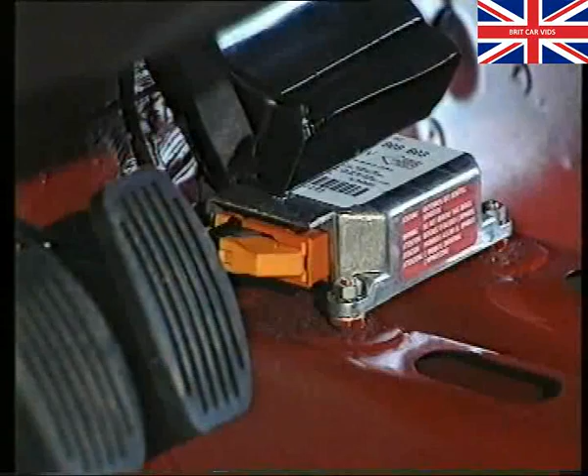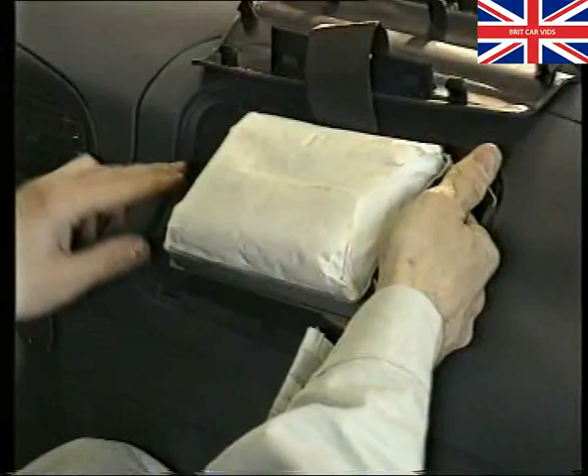The airbag system belongs among the so-called passive safety systems, i.e. elements increasing the safety for passengers and driver in the event of an accident. The electronically controlled system is made up of three elements: the control unit, the driver's module, and the passenger module.

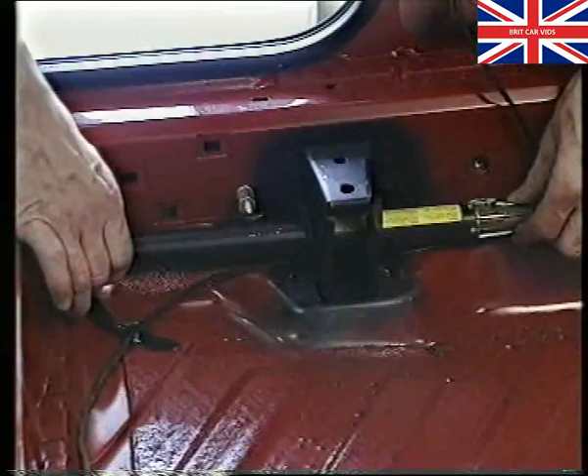For even greater safety in Skoda vehicles, the airbag system is installed in combination with special seatbelt tensioners, consisting of its own tensioning element, retracting system, and Bowden cable. The tensioner is mechanically controlled.

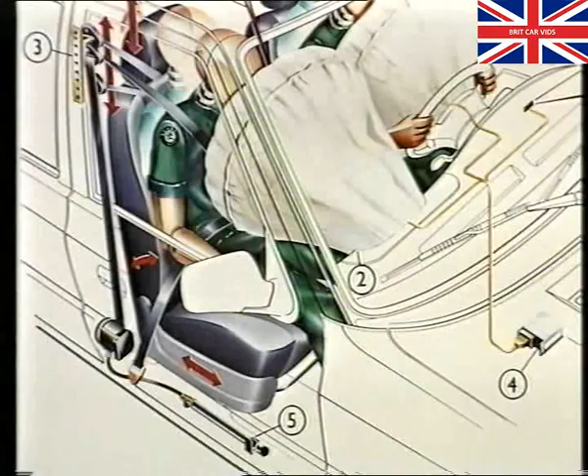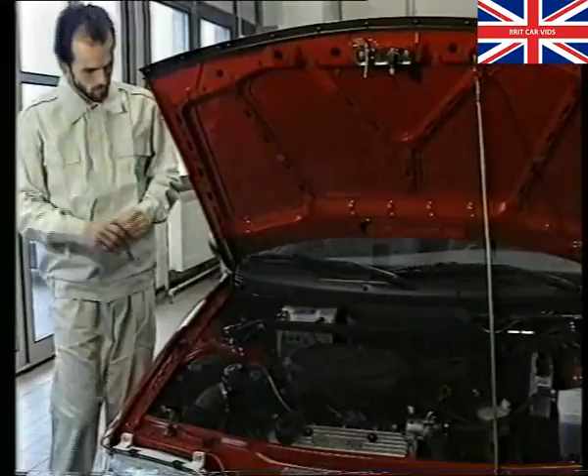Prior to disassembly or assembly of the driver's module, you must be aware that you are working with explosive materials, and so it is essential to proceed according to the workshop manual and to comply with the pertinent safety regulations. First, we disconnect the battery negative cable, and only then may we begin with the actual disassembly of the module.

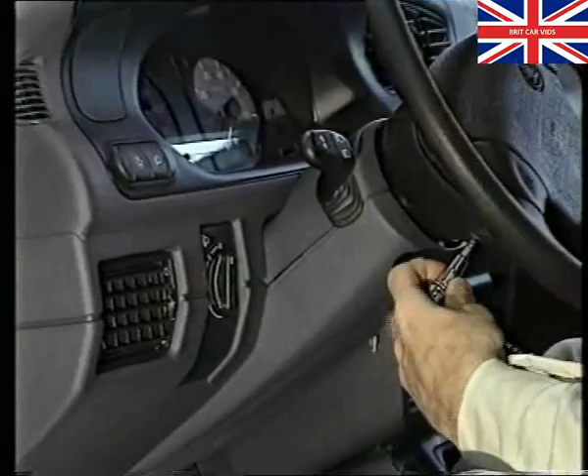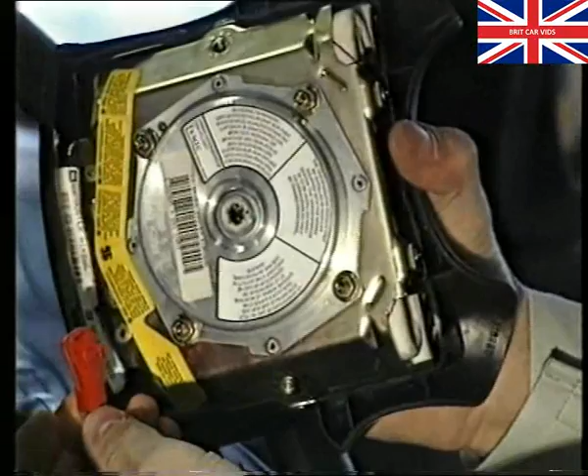On the reverse side of the steering wheel, loosen the two hexagonal screws. Then remove the module and disconnect the connector linking the module to the spiral link located within the steering wheel. Before removing the steering wheel, the front wheels must be aligned along the driving axis of the car.

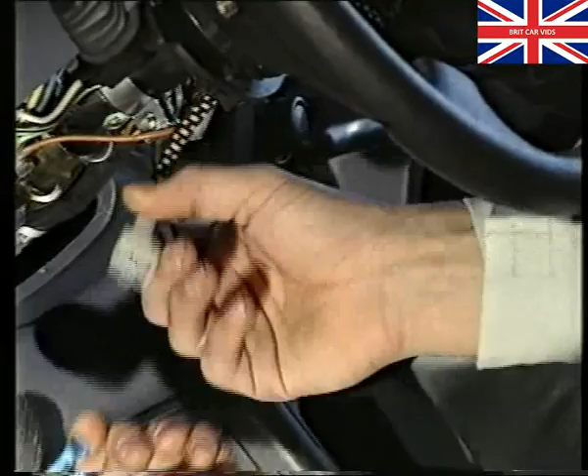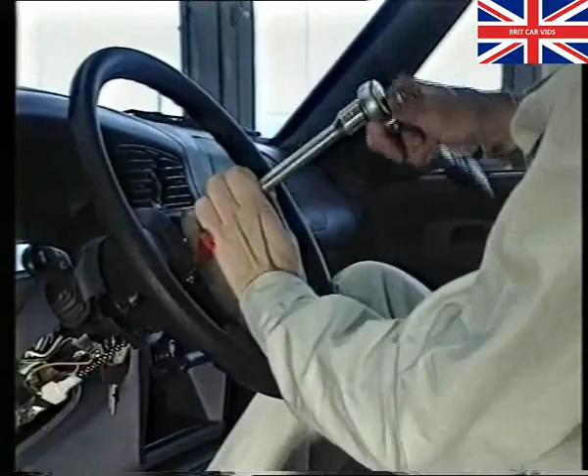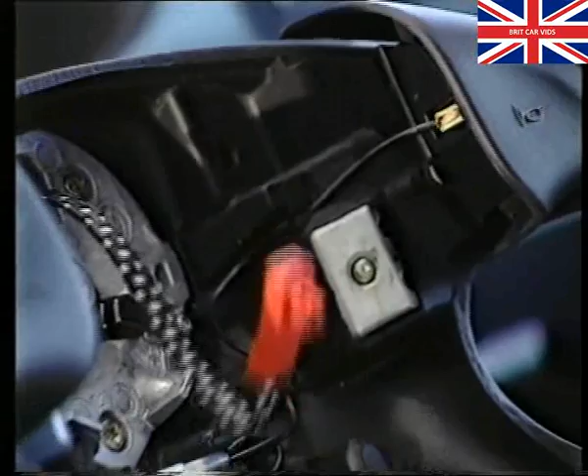Remove the lower covering of the steering column. Slide back the protective sheath and disconnect the connector linking the steering wheel to the vehicle's wiring loom. Now unscrew the steering wheel retaining nut, and pull the steering wheel off the steering column.

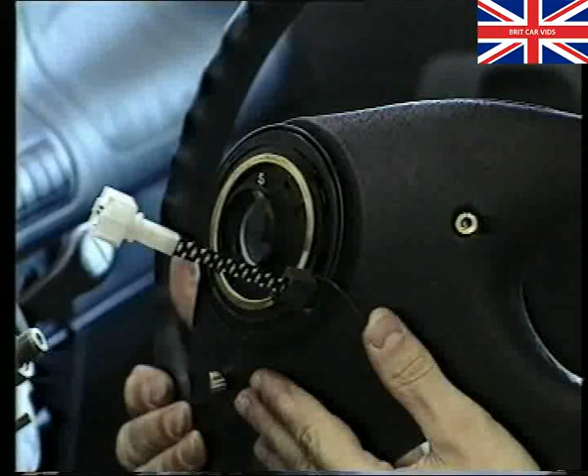Careful, after removing the steering wheel, do not rotate the locating part of the spiral link on the underside of the wheel, for this could become damaged. When assembling the steering wheel, proceed in the reverse order. Make sure the front wheels are facing directly forward, then install the steering wheel.

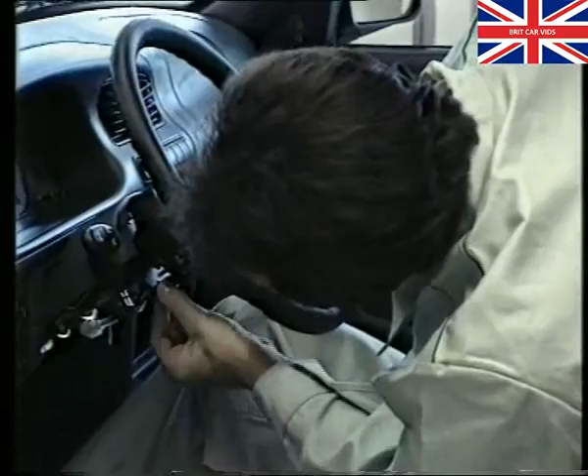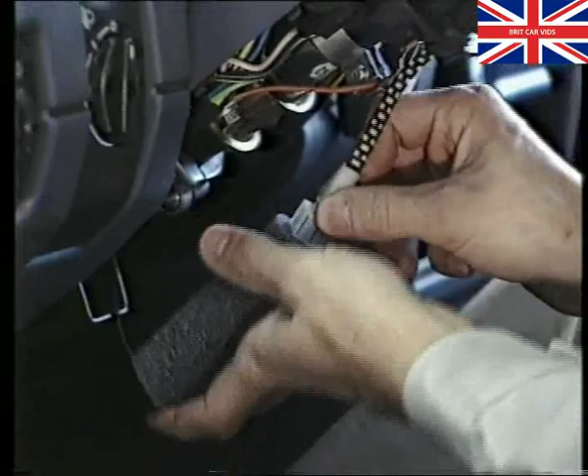If installing a new steering wheel, the protective clips used in transportation must be cut off after installation. These clips help to ensure the central alignment of the spiral link. Tighten the steering wheel nut to a torque of 30 Newton meters. Connect the steering wheel connector to its opposite number on the vehicle loom and position the foam rubber sheath. Then attach the lower covering of the steering column.

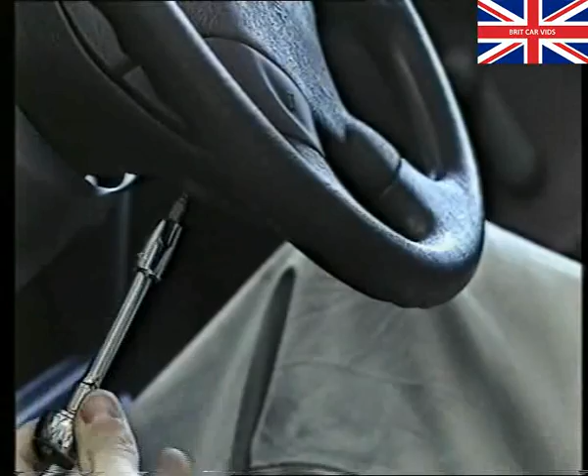And you are now ready to install the actual driver's module. First, connect the module's connector to the spiral link connector and carefully slide the module into the steering wheel housing. It should slip onto both screws, but take care to center the module properly. Then tighten fully to a torque of 5 Newton meters.

Before removing the passenger module, you must once again disconnect the battery negative cable. Then carefully loosen the plastic module cover and set it aside on the dashboard. Loosen the 4 nuts by which the module is secured to the holder. Disconnect the wire connector and carefully remove the module from the dashboard.

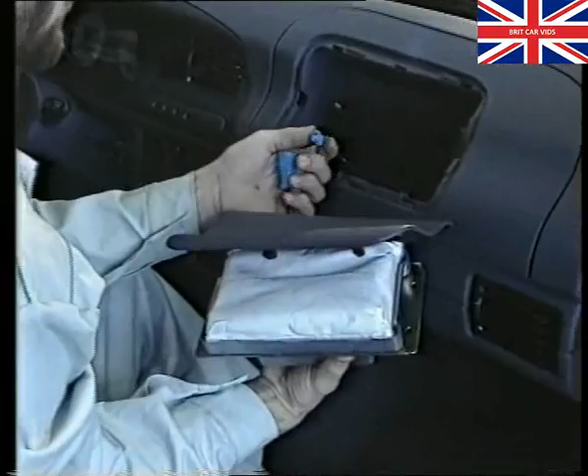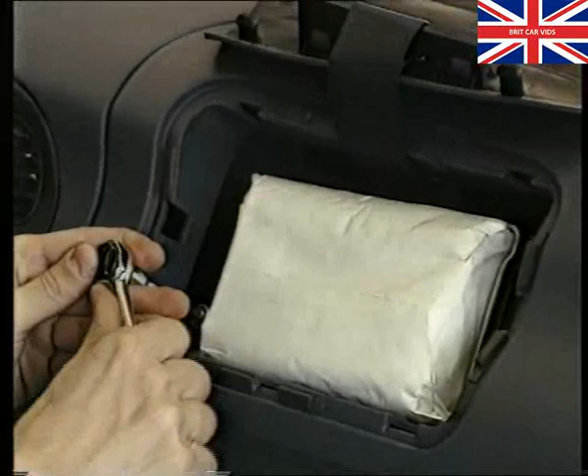Assembly takes place in reverse order. Plug in the wiring connector, insert the module into the dashboard, and secure it with the 4 nuts to the holder, tightening these to a torque of 5 to 7 Newton meters. Then repack the textile belt and snap on the plastic module cover.

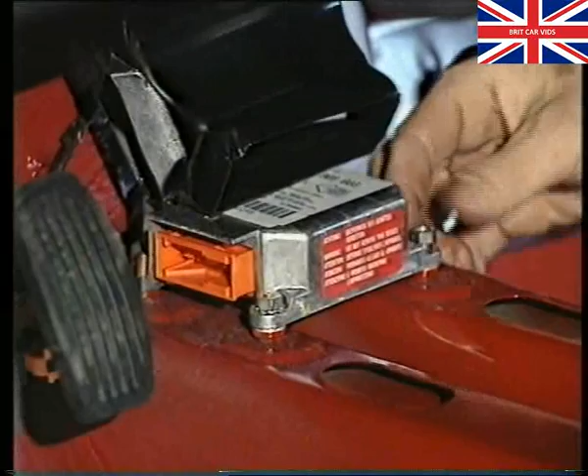The control unit is located on the floor at the front of the central tunnel. Prior to disassembly, you must again disconnect the battery cable. Then dismantle the central console and remove the seat and carpet. Unplug the control unit connector. Careful about the connector latch, which we shall discuss later. Then unscrew the retaining nuts and remove the control unit.

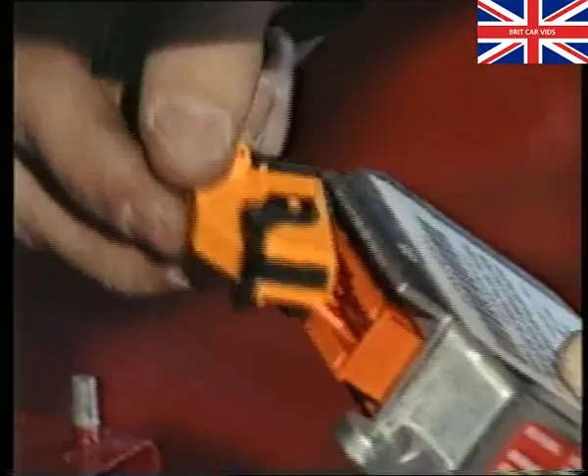In order to avoid possible damage during assembly and disassembly, watch the function of the control unit's connector latch. In this position, the connector is loose. While in this position, the connector is prevented from slipping out.

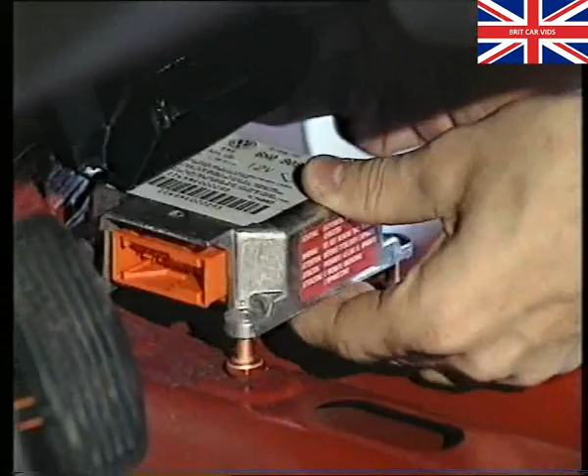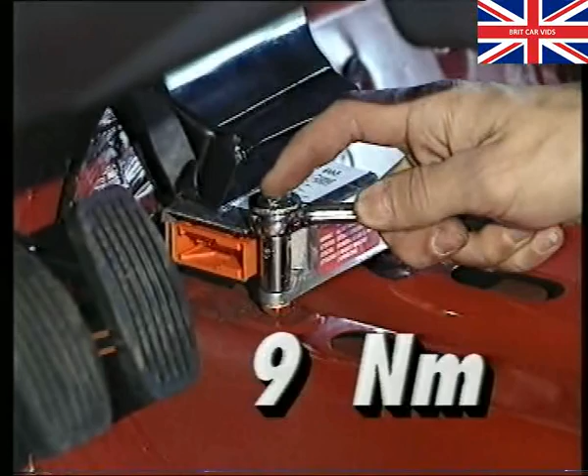When assembling the control unit, you should ensure that the studs which serve to ground the unit are clean. Secure the control unit onto the clean studs, and because the connection is of literally vital importance, tighten to a torque of 9 Newton meters. Install the connector, and again watch out for the correct latch position. Replace the carpeting, the central console, and other accessories.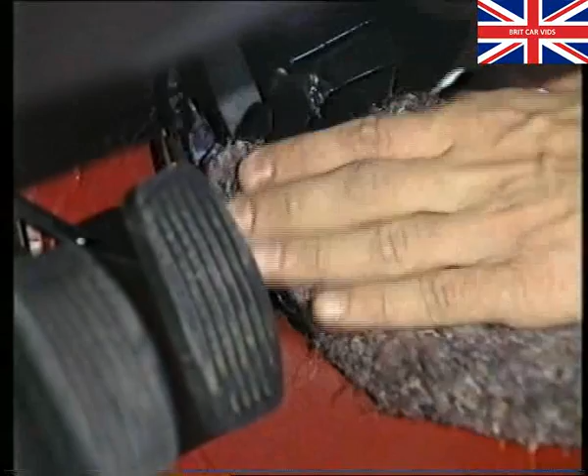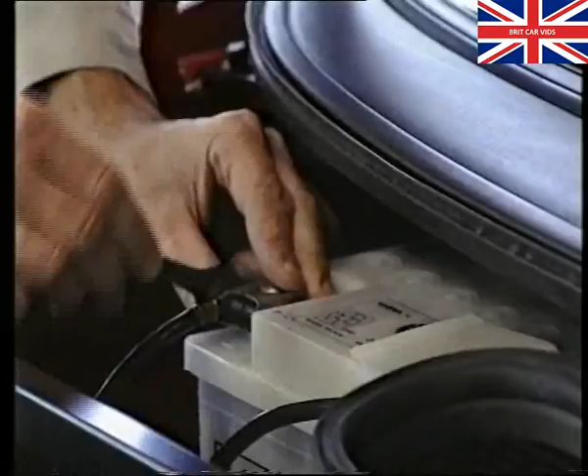Turn on the ignition, and only then reconnect the battery cable. Careful, nobody must be inside the vehicle at this moment. The airbag warning light is located on the very right-hand side of the instrument panel. If everything is all right, the light should shine for only 4 seconds after turning on the ignition. If there is a fault in the system, the warning light will continue to shine. The function of the warning light is described in detail in the pertinent owner's manual.

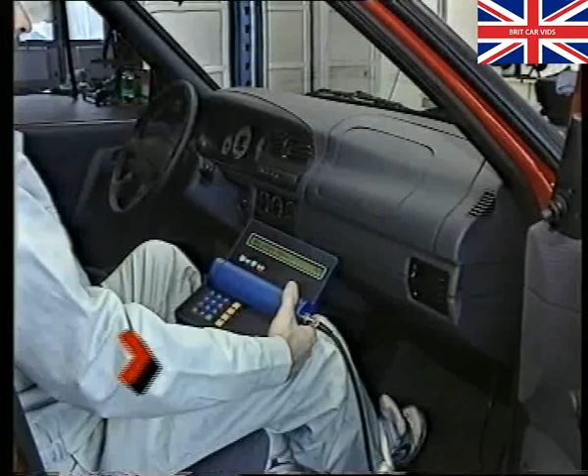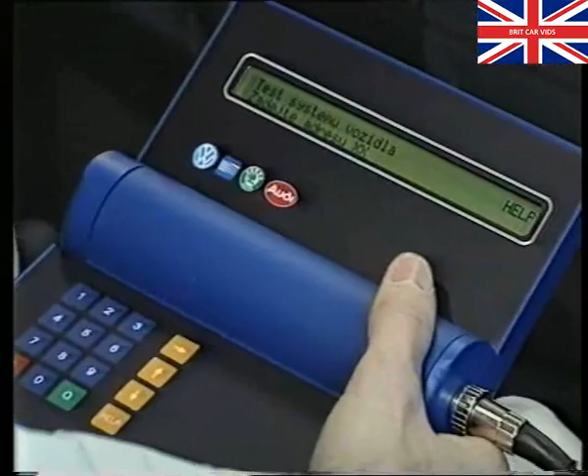The diagnostics of the airbag system are carried out by means of the VAG 1552 instrument. After connecting this instrument to the diagnostic connector located under the dashboard, request the address for the airbag electronics. Address word 15, airbag.

By requesting function 02, you will ask for information on any faults in the memory. If there is indeed a fault located in the memory, the pertinent fault code will appear on the display. A survey of all fault codes is to be found in the airbag chapter of the workshop manual.

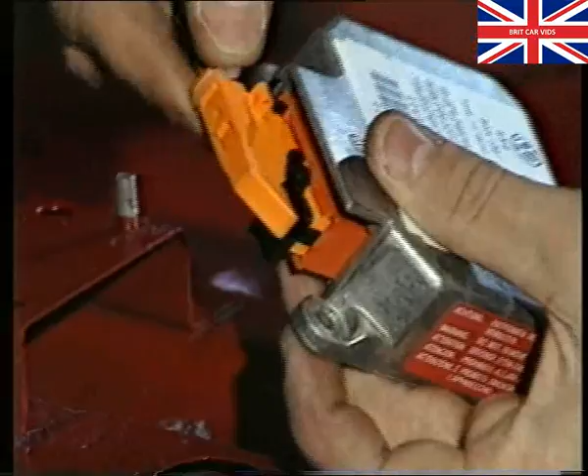In case you wish to install a new airbag control unit, it must then be activated. Request function 07, the coding of the control unit, and proceed with the relevant 5-digit code given in the Felicia workshop manual. After entering the correct code, the control unit is activated.

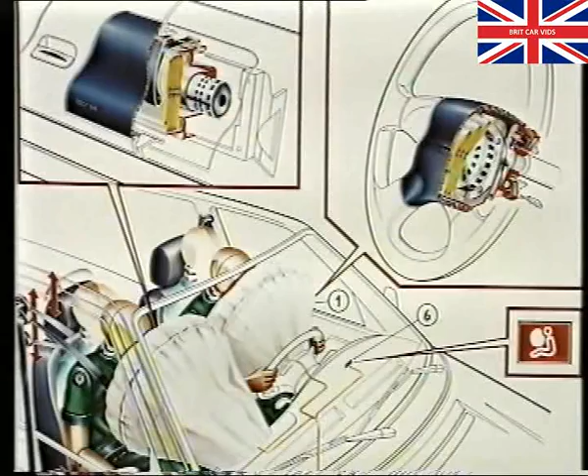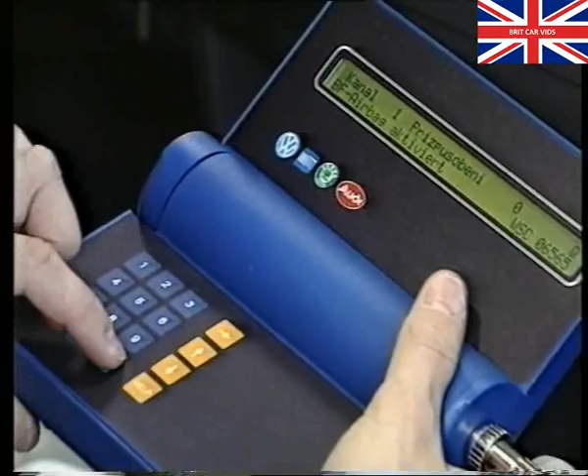In the case where there is an airbag for both driver and passenger, the VAG 1552 instrument may also be used to disengage the passenger module. Enter function 10. Adaptation. Channel number 01. Press the keys with the vertical arrows, thereby altering the value between 0 and 1. This disengages or engages the module depending on the value.

You can recognize if the module is disengaged when you turn on the ignition, as the airbag warning light will shine for 4 seconds and then flash for 12 seconds at a frequency of 2 Hz. The passenger module may be engaged by proceeding in the same order but changing the value.

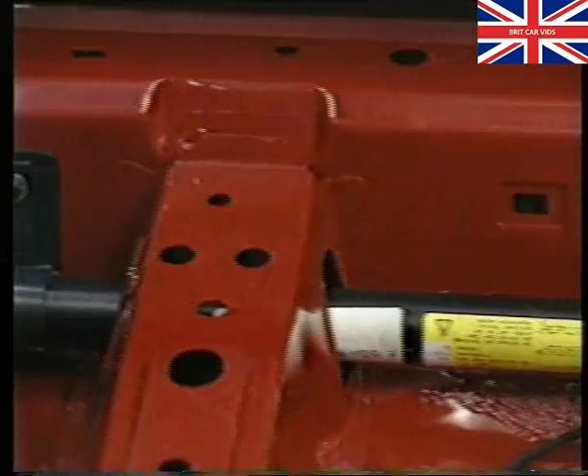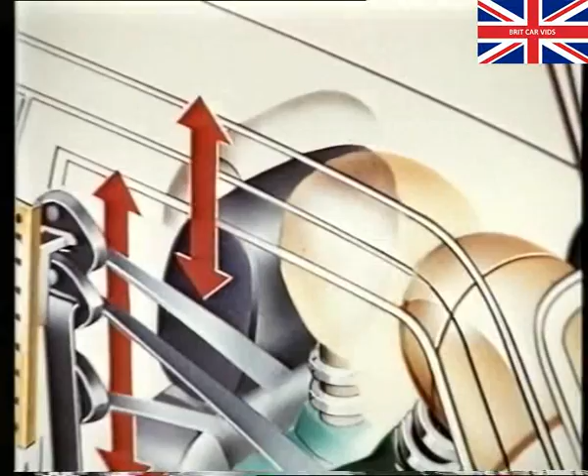The actual seatbelt tensioner is located on the floor along the door threshold under the carpeting. It is linked via a Bowden cable to the seatbelt retractor mechanism, which is built in the same way as a classic seatbelt without the tensioner. The belt tensioner is activated mechanically by means of a sensor inside the tensioner.

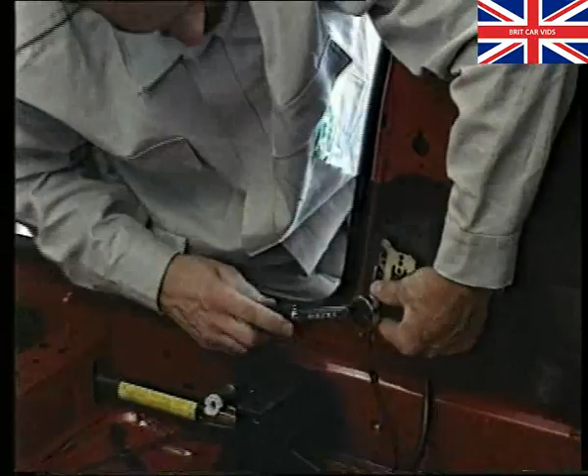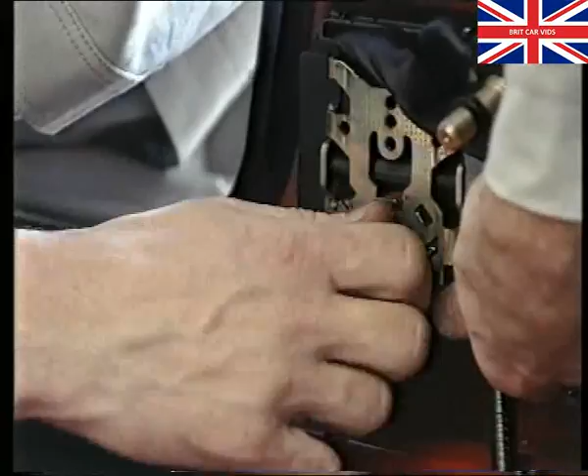Prior to disassembly, remove the seat, the plastic cover of the door threshold, and the front carpeting. Then remove the seat belt with the retractor mechanism. Loosen the hexagonal bolt and carefully remove the tensioner.

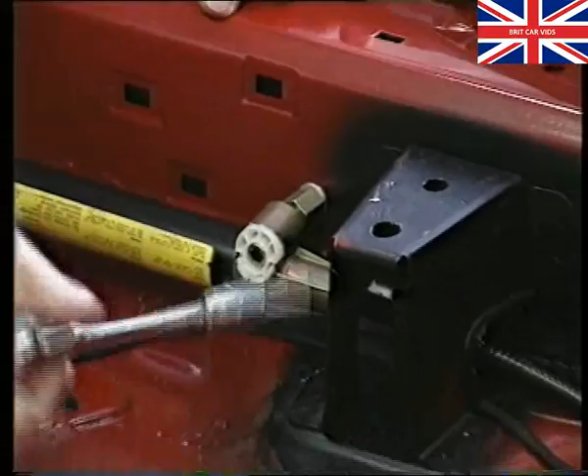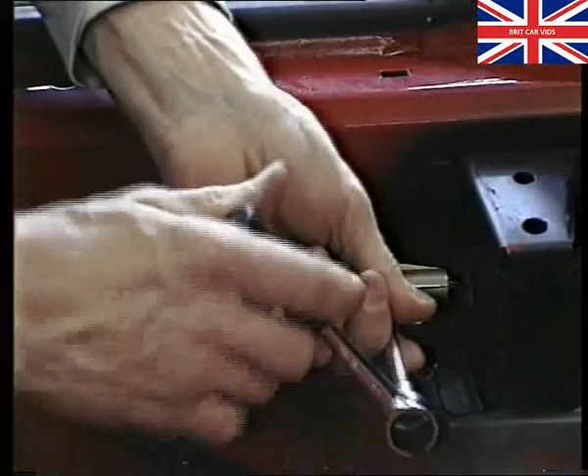Assembly takes place in the reverse order, i.e. insert the tensioner, tighten the bolt to disable the transportation lock, by moving it to the operating position. The tightening torque is 18 Newton meters. Then assemble the retractor mechanism with the seat belt.

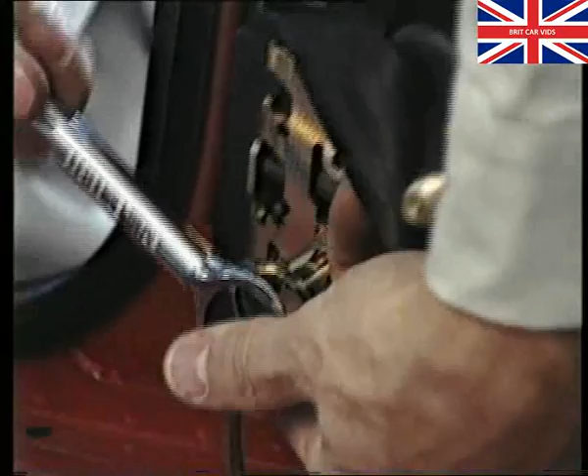If the tensioner has been activated, the entire seatbelt system must be replaced. A tensioner which has been activated may be recognized by the missing white cover at the free end.

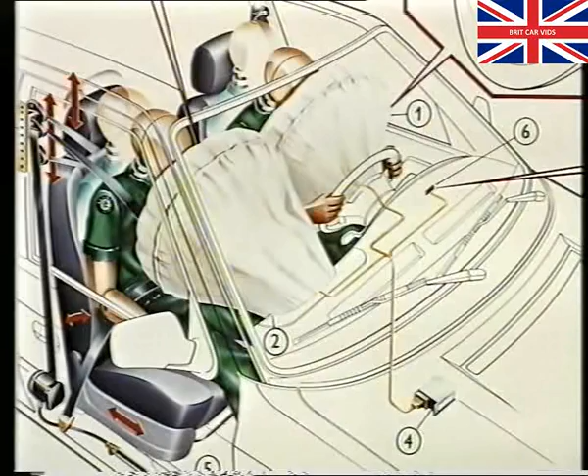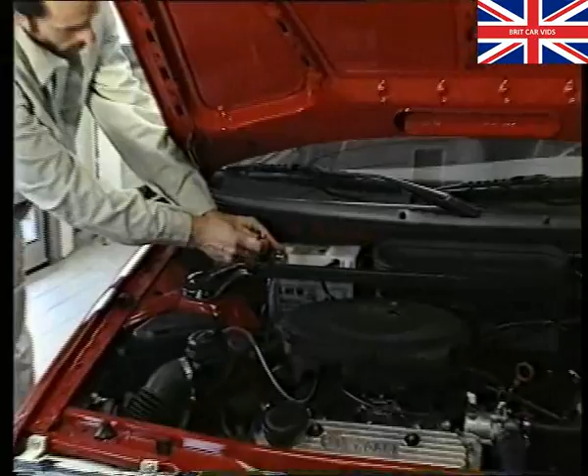Let us repeat the basic safety regulations for working with individual components of the airbag system. Only trained personnel may carry out any form of work. Before beginning any work, always disconnect the negative pole of the battery. Use only the VAG 1552 or 1551 testers for diagnostics.

Whenever temporarily putting the module down on a surface, keep the airbag facing up. When carrying the module, however, the airbag must be facing away from the body. Assemble the modules immediately after removal from the transport packaging, and replace it in the packaging if the installation process is at all interrupted.

Damaged modules must not be used. When reconnecting the negative pole to the battery, nobody must be inside the vehicle.

If the module is to be set off artificially, for example prior to disposal, this must take place in the vehicle itself by means of the VAG 1821 instrument. Disconnect the negative pole of the battery, and then connect the module through a special cable to the VAG 1821.

Place the battery about 10 meters away from the vehicle. Connect the ignition circuit to it, and set off the module. The vehicle doors must be closed and nobody must be in the vehicle.

In conclusion, let us look at the individual phases of activity of the airbag system upon collision.